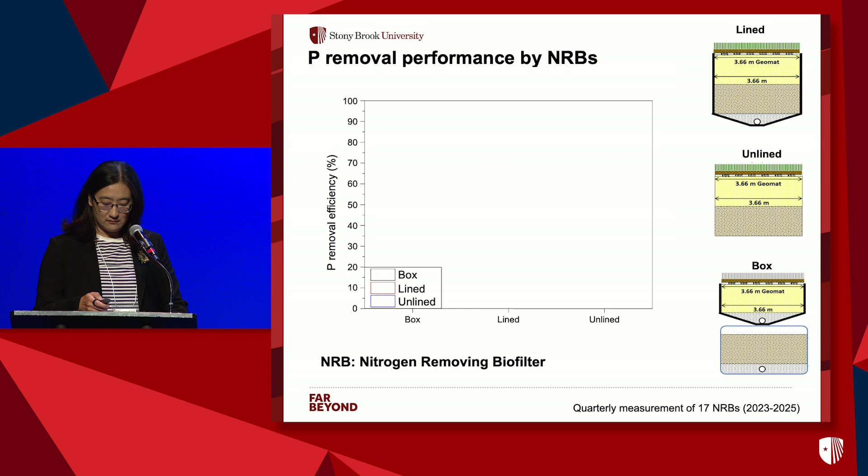So let's first take a look at our effort on the NRB monitoring. I don't know why these do not show up, but basically there's this very busy figure. We have been monitoring the NRBs' performance for their phosphorus removal over the past 3 years. We have been conducting quarterly monitoring. What I'm trying to show you is that the influent phosphorus level from the septic tank effluent is really fluctuating over time.

Sorry. This is supposed to be a summary slide. Basically, what I'm trying to tell you is that all three types of configurations have shown a substantial phosphorus removal in the range of 60% to 80%. So the data tells us these NRBs not only remove nitrogen as they are supposed to do, they can also remove a substantial level of phosphorus.

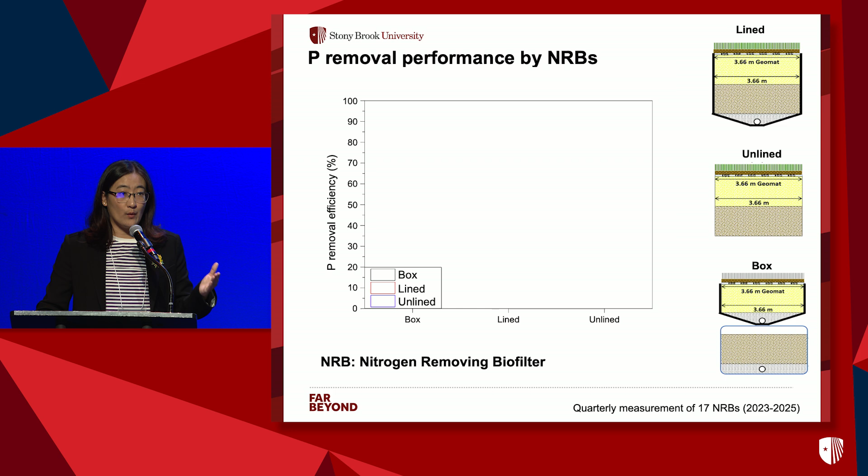So the question becomes, where is this phosphorus being retained, in which unit? And would this retention be sustainable over time? In order to answer this question, we conducted two parallel studies to evaluate these two separate units, the nitrification unit and the denitrification unit. And we also compared the system performance between the newly installed NRBs and the aged NRBs.

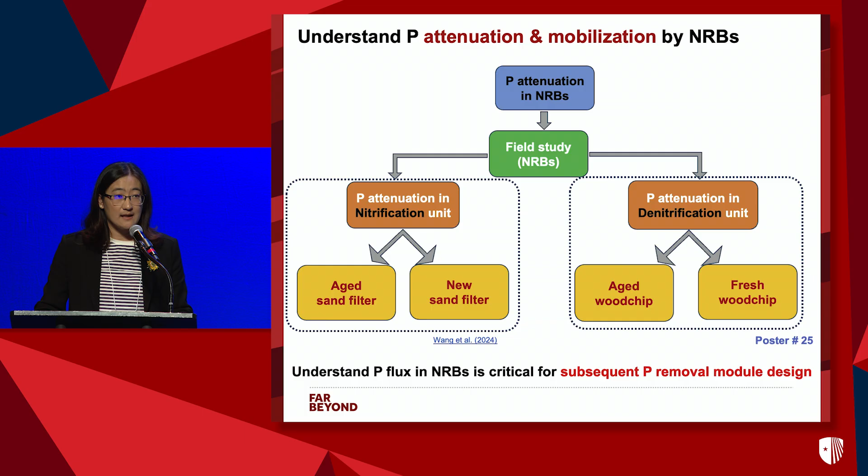We try to understand where this phosphorus is being retained and where it can be released to the environment. Understanding this phosphorus flux is very critical for us because if it is finally leaching from NRBs, we are going to design a final polishing unit to capture that phosphorus.

So let's first take a look at the performance of the nitrification unit. What we did is we constructed several lab-scale columns using aged sand and fresh sand. We applied septic tank effluent to all these columns. This figure shows you that the aged sand can remove roughly 50% of the total phosphorus from the septic tank effluent, while the new sand can remove roughly about 30%.

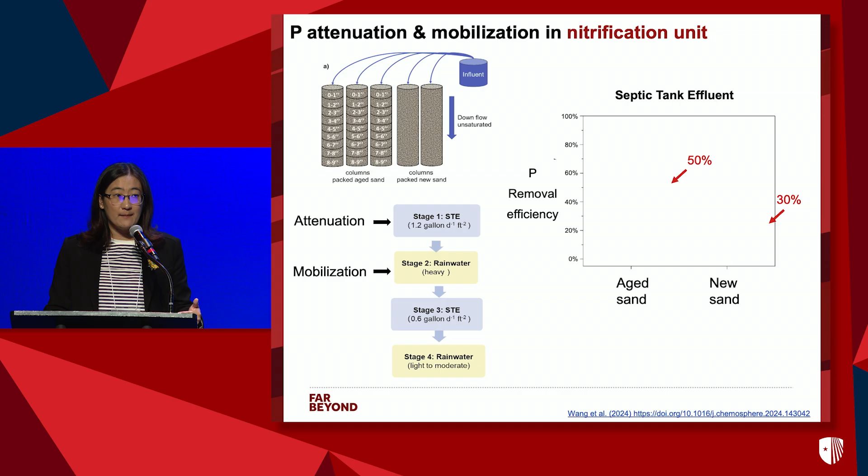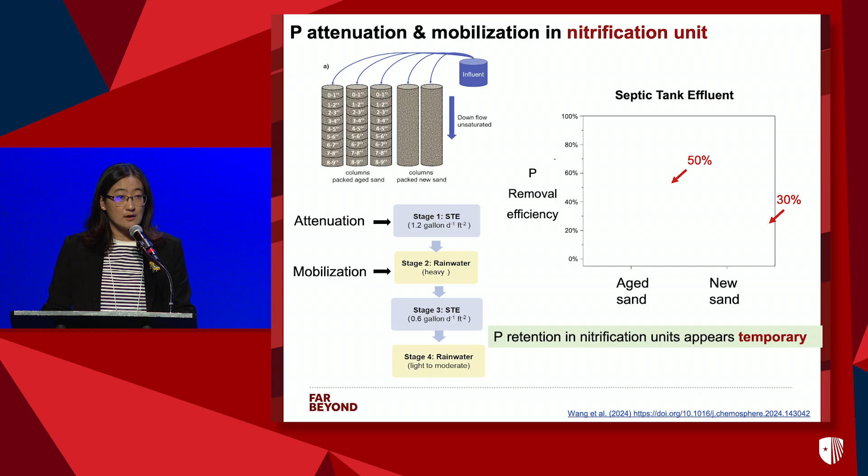We also applied synthetic rainwater to mimic natural precipitation. We observed that the phosphorus can be leached out from both aged sand and fresh sand. So these results tell us the phosphorus retention in the nitrification unit is temporary, and there's a potential for that phosphorus to be remobilized. The same trend was observed in the denitrification unit as well.

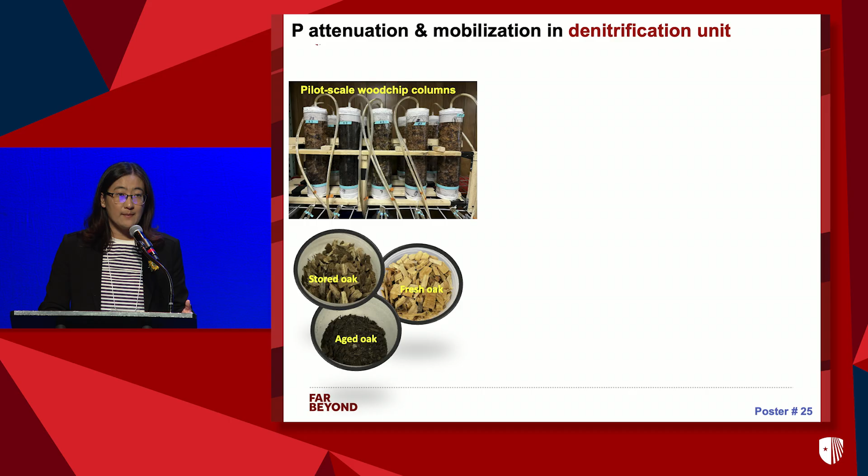We also constructed parallel wood chip reactors using fresh wood chip, aged wood chip, as well as wood chip that has been in storage for a couple of years. We applied the nitrified effluent, which will enter our denitrification unit, in our pilot testing columns. We also changed the phosphorus levels in this nitrified effluent, and later on applied a synthetic stormwater to see if the phosphorus can be leached out.

As you can see here in the summary, in terms of phosphorus removal, the storage wood chip can remove most of the phosphorus, followed by the fresh and aged wood chips. And when we look at the potential of phosphorus release, the aged wood chips can actually release a significant amount of phosphorus.

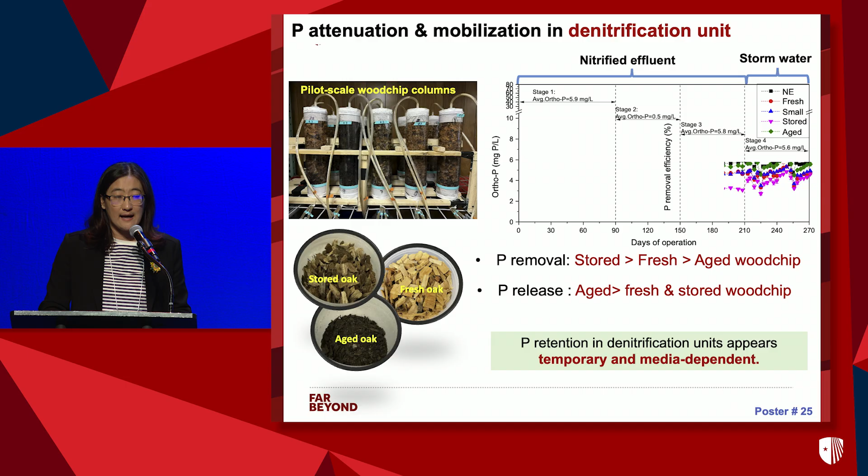So basically what these results tell us is that the denitrification unit can also temporarily retain phosphorus, and the capacity of this retention is strongly impacted by the age of the systems. Taken together, these two studies directly motivated our subsequent effort to develop a polishing unit to really capture that phosphorus.

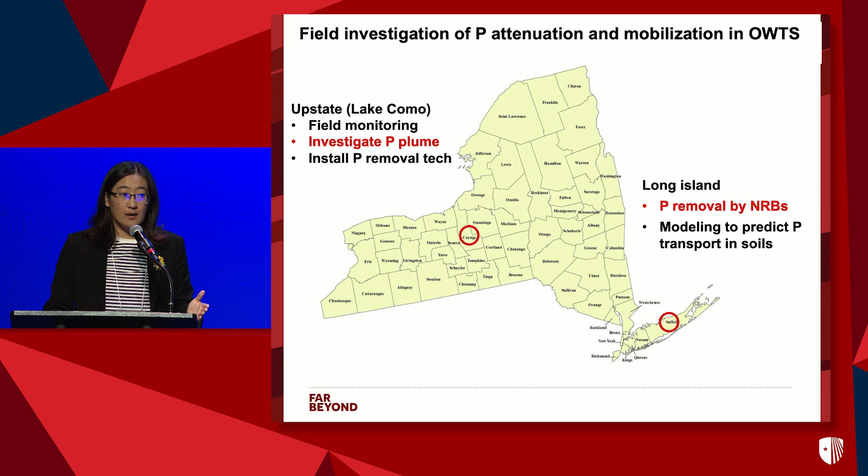The other study that we conducted in upstate New York is trying to help us understand, if phosphorus leaves the on-site system and enters the environment, how it would move in the surrounding environment. To answer this question, we identified a few study sites in Lake Como, which is a sub-watershed of Lake Cayuga. We selected study sites which represent different land use settings, including farmland, forest, as well as wetland. At these sites, we have been monitoring the groundwater, and we also collected soil core samples and lake waters. We also conducted statistical analysis with the results we obtained.

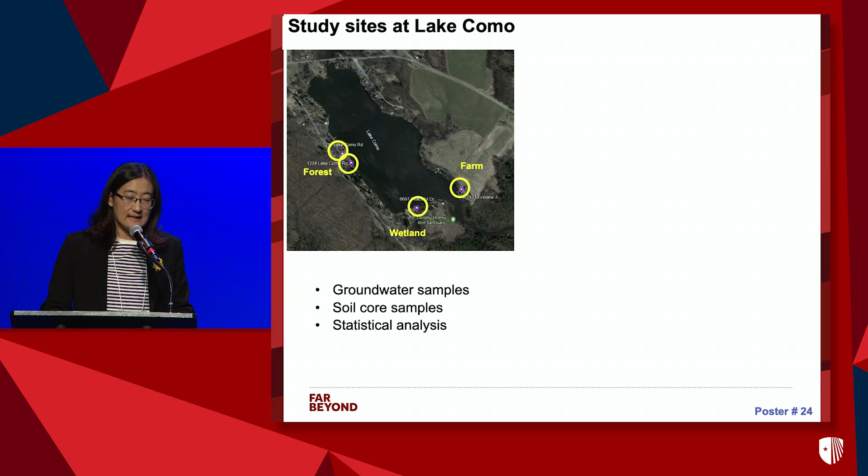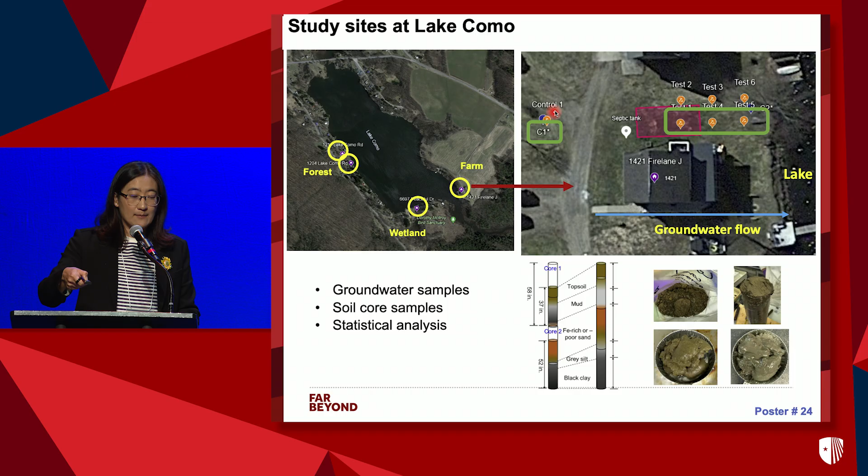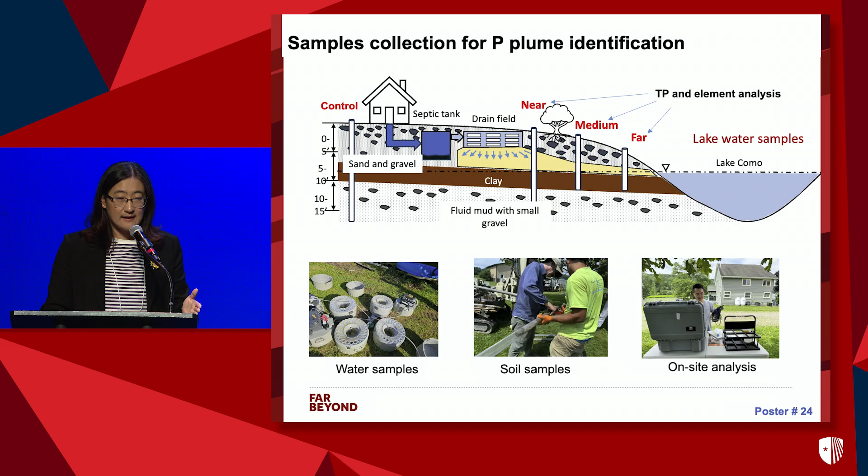On the right, I will give you an example of one site close to a farmland. You can see here is the groundwater flow direction. We collected soil samples between the drain field and the lake water, and upstream we also collected a control sample to analyze these soil profiles. In the next slide, I can show you from a side view where we collected all those soil samples. Here is the control sample, and depending on the location of our soil cores, we collected close to the drain field, medium distance, and further from the drain field. We collected at different depths, and all the samples were tested for total phosphorus content as well as background metal concentrations.

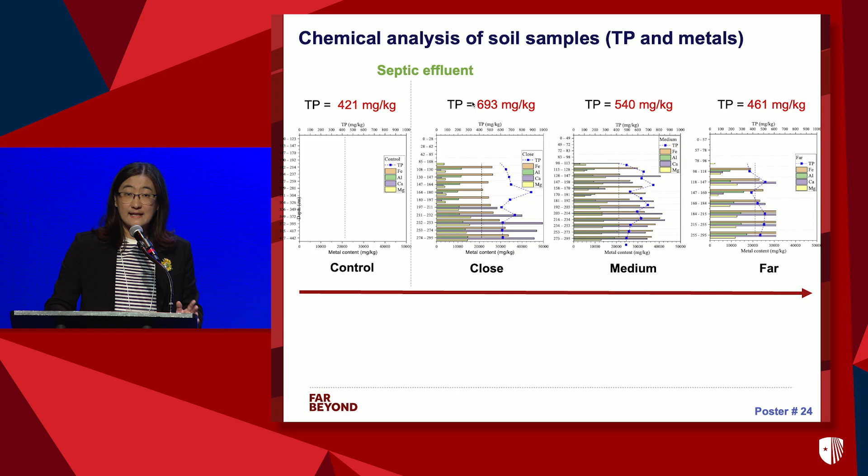In the next slide, here is a very busy slide. You can see several data sets, but I would like to focus your attention on the blue line. I think the first one is missing, but the blue lines show you the total phosphorus concentration at the different depths of these 4 locations. When septic tank effluent enters the drain field, you will see the total phosphorus level increase by almost 60% compared with the control site. And this total phosphorus level will decrease as you go further from the drain field.

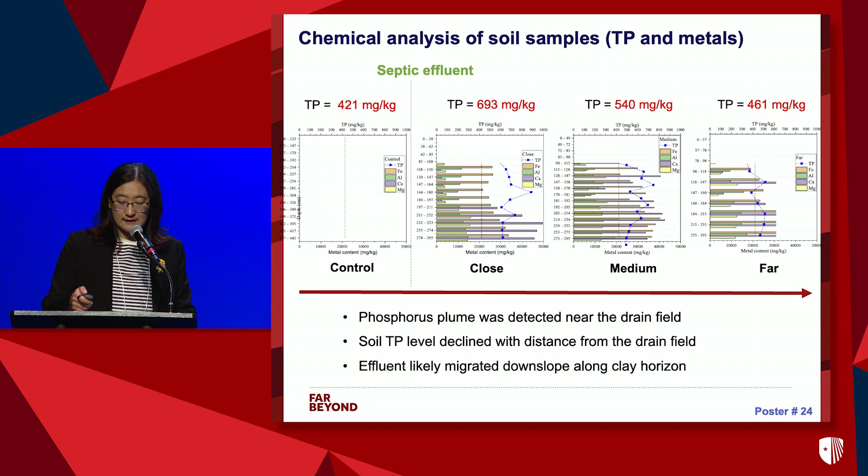So this is a very clear pattern showing this wastewater-impacted phosphorus plume at this watershed. We found the total phosphorus concentration decreases with distance, and because there's a clay layer at the bottom of this specific study site, the concentration of total phosphorus increases when it gets close to the clay layer. So now we understand that there is a phosphorus plume at this study site.

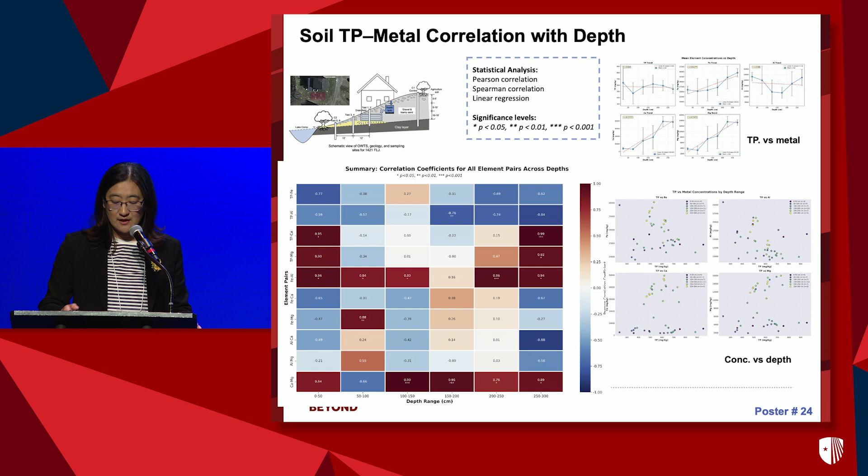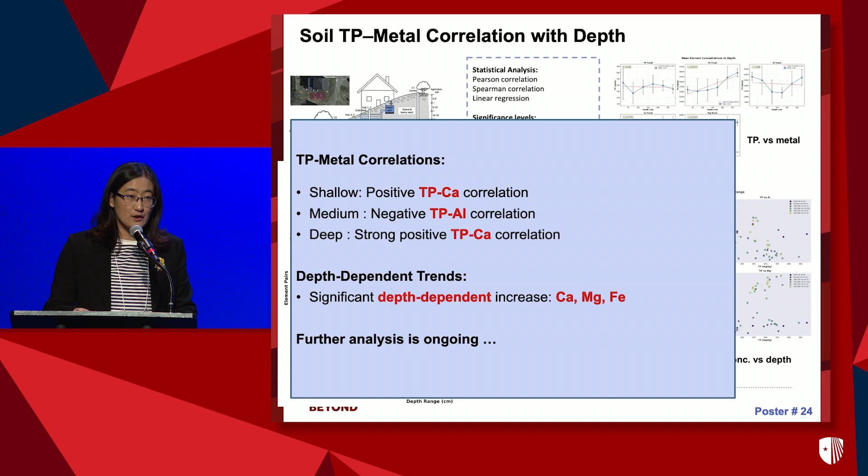Another question that comes up is, can we tell which factors really control these total phosphorus levels, high or low, and how much it will move? So we conducted a series of statistical analyses. What we found from our initial analysis is that certain metals such as calcium, magnesium, and iron increase in concentration as depth increases at the study site. But the correlation between total phosphorus and those metal oxide concentrations varies at different vertical locations, which tells us that at this specific site, total phosphorus levels are highly impacted by the specific site conditions, by the geochemical conditions.

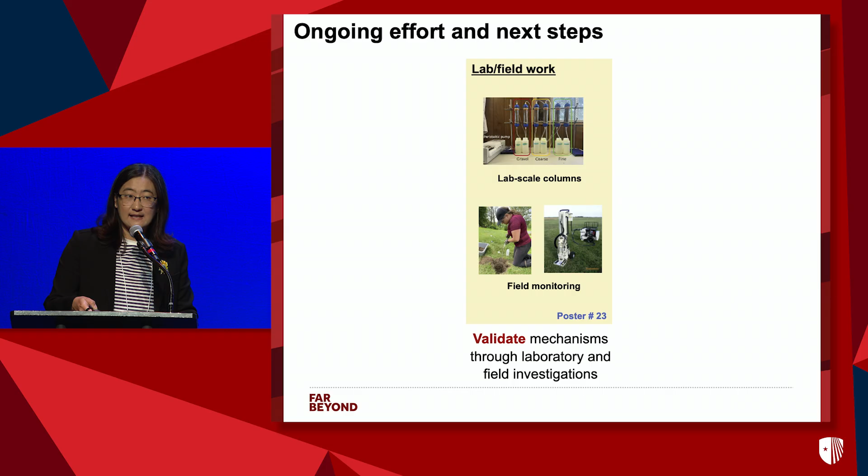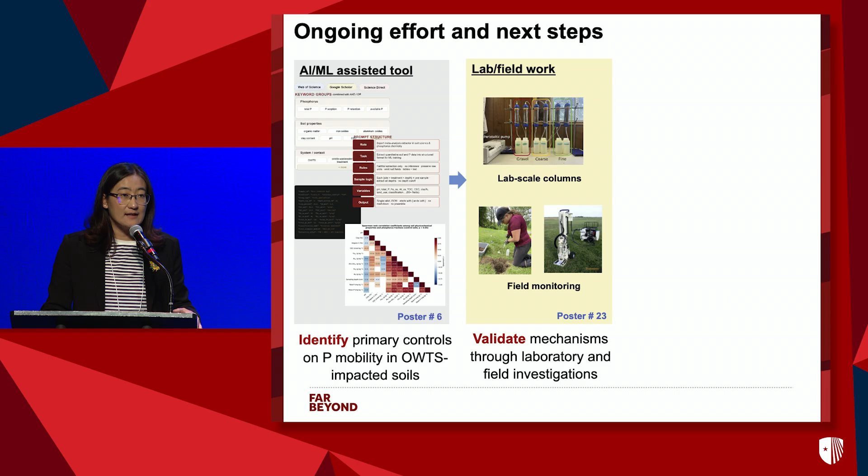Based on what we have found from these field studies, our current effort will continue to conduct lab-scale column studies in controlled environments and continue our field investigation. In parallel, we're now using AI and machine learning tools to dig into tens of thousands of manuscripts and literature to identify the primary factors that may govern total phosphorus levels. We're also working on fate and transport models that will improve our ability to predict total phosphorus presence and mobility. These tools will also help us identify locations with the greatest risk of phosphorus loss, and guide us to select the best technology to put at that site.

So from the field monitoring effort, the question becomes, is there any phosphorus removal technology available on the market that can really solve the problem? So now I'm going to move to my second section of the presentation to look at commercial product validation.

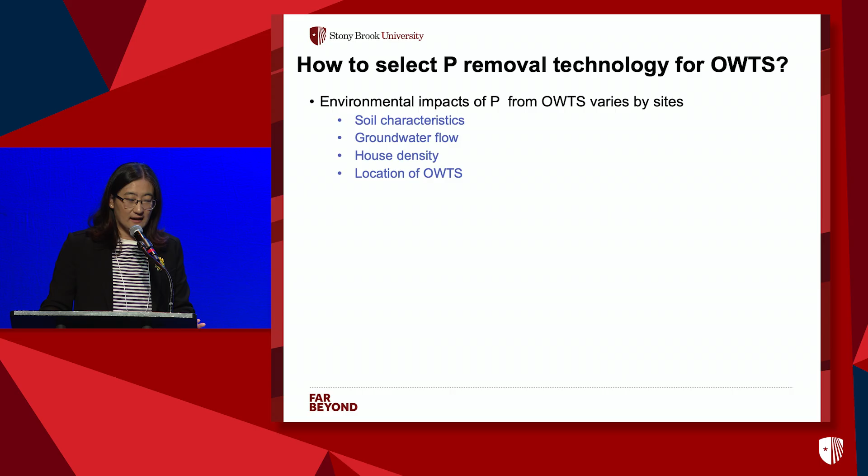So over the past few years, one of the very important lessons we have learned is that for this phosphorus from on-site wastewater systems, when we look at their presence, attenuation, and mobilization, it is really impacted by very complicated geochemical conditions, and also the groundwater flow velocity, the housing density, and so on. So that means there's no single solution that can be applied everywhere. So in order to apply such a technology to solve the problem, we have to be very site-specific.

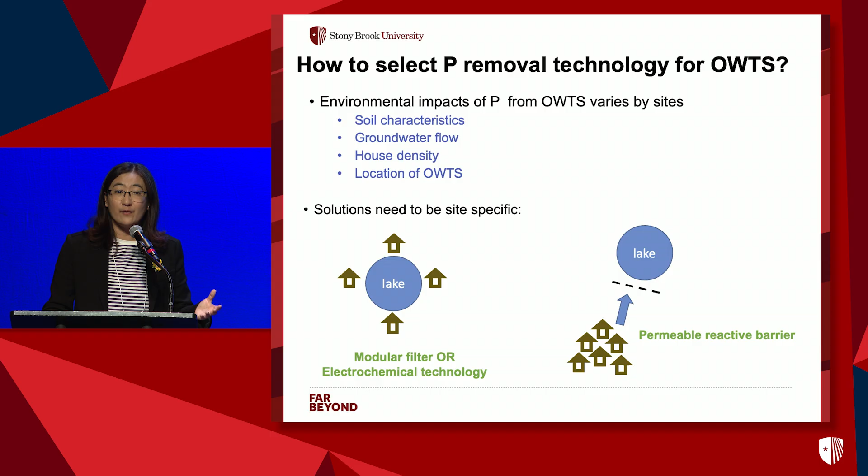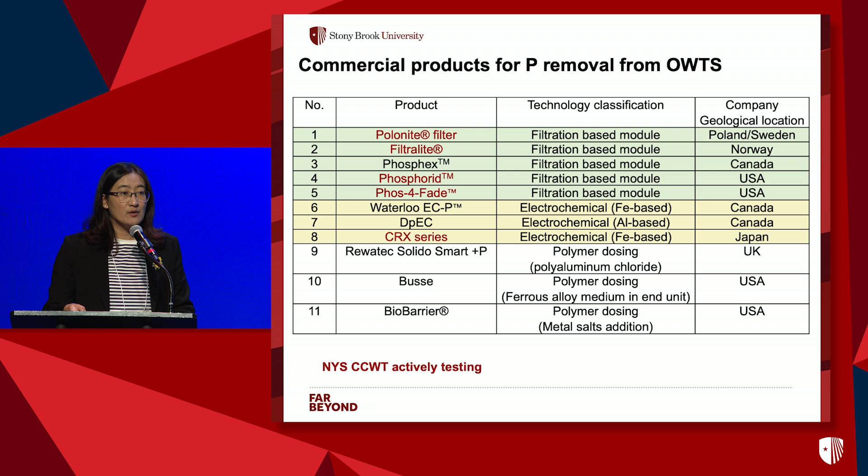So that is the reason that the center has established an independent evaluation program so that we can evaluate the currently commercially available products and identify their advantages, limitations, and the best scenario for that technology to be applied. So in this slide, here is a table to show you a summary of certain commercial technologies that are currently available on the market. Depending on their removal mechanism, we can group them into three categories: filter-based media, electrochemical technology, and metal dosing technologies.

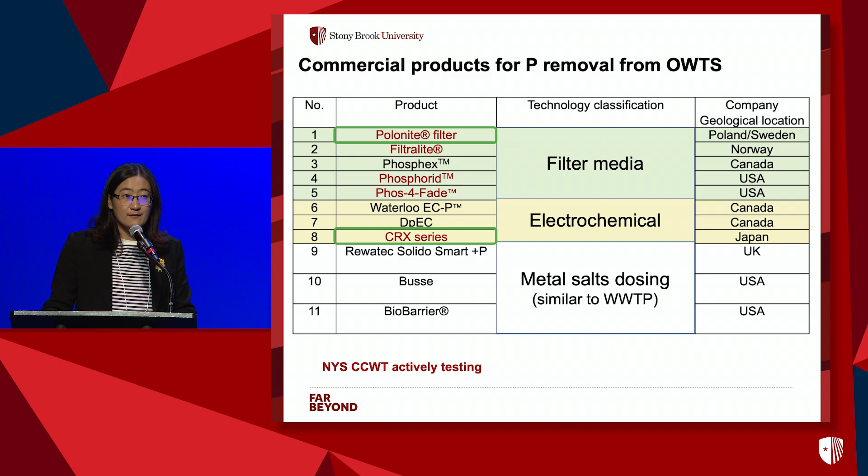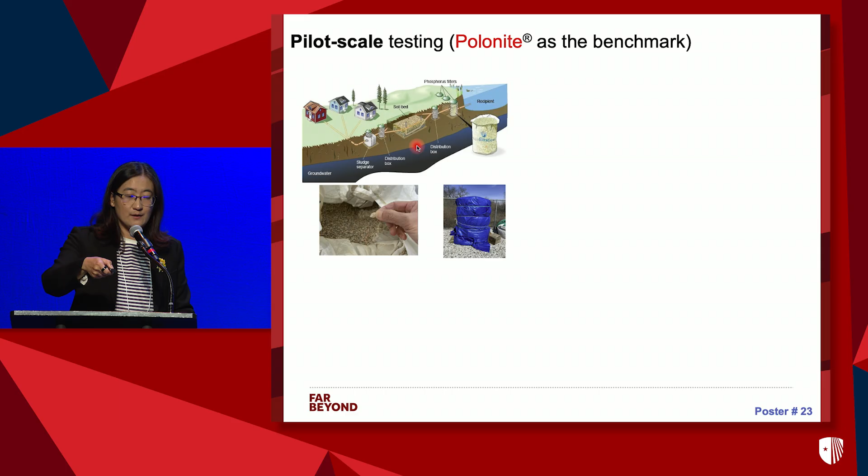So today I'm going to give you two quick examples to show you two of the technologies that the center is currently actively evaluating. The first one is called a Polonite filter. Polonite is a mineral filter that is produced in Poland. This product has been widely used in Northern Europe, and it serves as a polishing unit at the end of the treatment train of an on-site wastewater treatment unit. So at the center, we use Polonite as a benchmark.

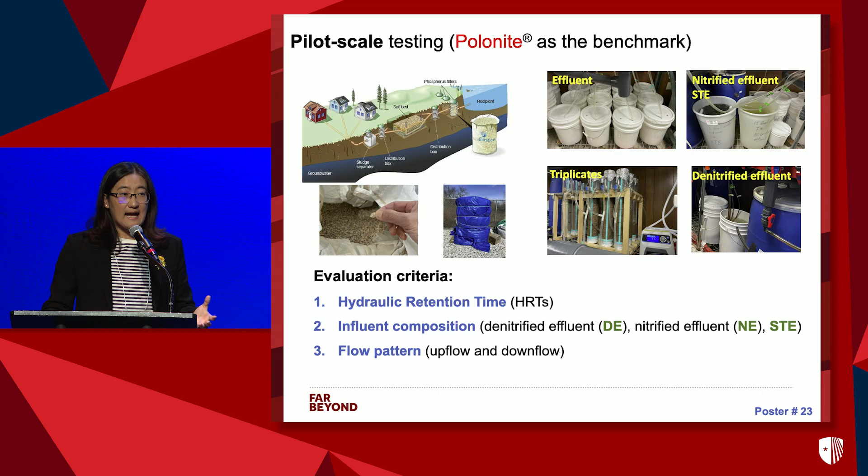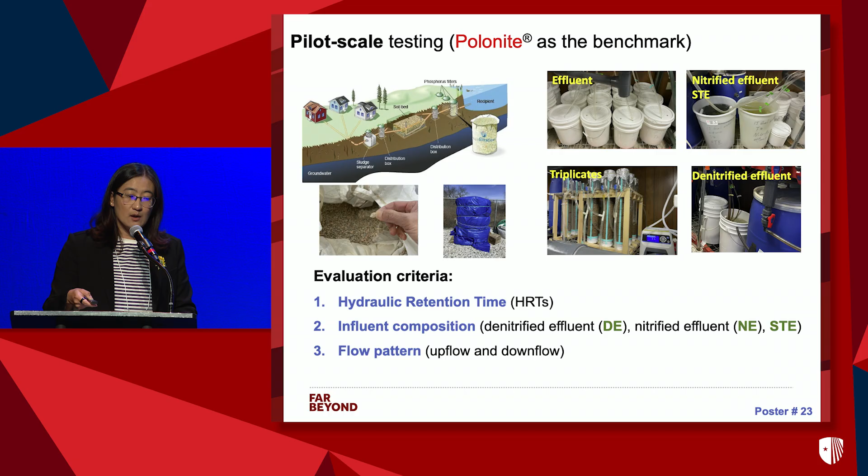In the research trailer, we have constructed a pilot scale test. We're testing this media using different hydraulic loadings and different flow configurations, either upflow saturated conditions or downflow gravity-driven conditions. We're also testing the filter's performance by treating different types of wastewater, like septic tank effluent, nitrified effluent, or denitrified effluent. We have conducted this pilot testing for over 500 days.

And also, if we extend the hydraulic retention time, which means when the system size is a little bit bigger, you can really extend the system longevity. So basically, we use this Polonite benchmark to serve as the comparison base. We developed an SOP so we can compare other commercial products to see their performance compared with Polonite.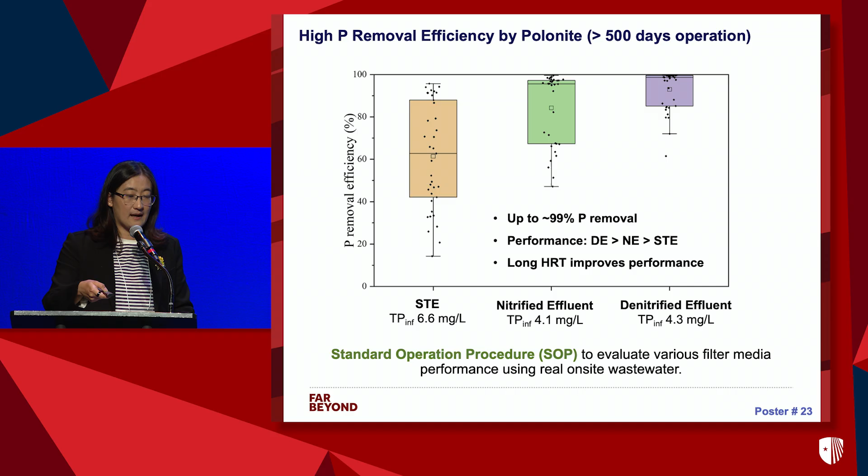So now we know Polonite really did a good job removing phosphorus, but we also have another question: how much phosphorus can this material retain? It is a very important question because it will help us decide the maintenance frequency. When do we need to replace the filter? And is there any potential to recover phosphorus from this filter?

So in this slide, you can see all these columns are color-coded. Sorry, I think I need to get familiar with my pointer. So how can I go back? Right, okay.

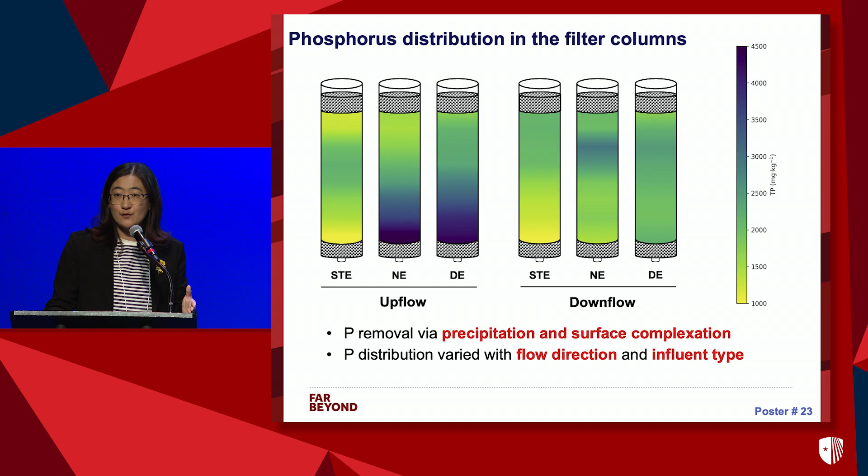So basically, these columns are color-coded. The darker the color, the more phosphorus it has attenuated. You can see here that in the upflow configuration, the blue color means more phosphorus is being retained. When we are treating nitrified effluent and denitrified effluent, most of the phosphorus is attenuated. This also agrees with our physical-chemical experimental data that when we use Polonite to treat denitrified effluent, it gives us the best performance.

Another commercial product, the electrochemical technology, we're also testing. The electrochemical approach provides an alternative, a very compact and highly controllable unit that can be integrated into the current IA system. The figure on the top left shows the basic mechanism: when we apply a low current density, the electrode, especially the anode in red, will release metal ions, either iron or aluminum. These metal ions precipitate phosphate, which can be removed from the wastewater.

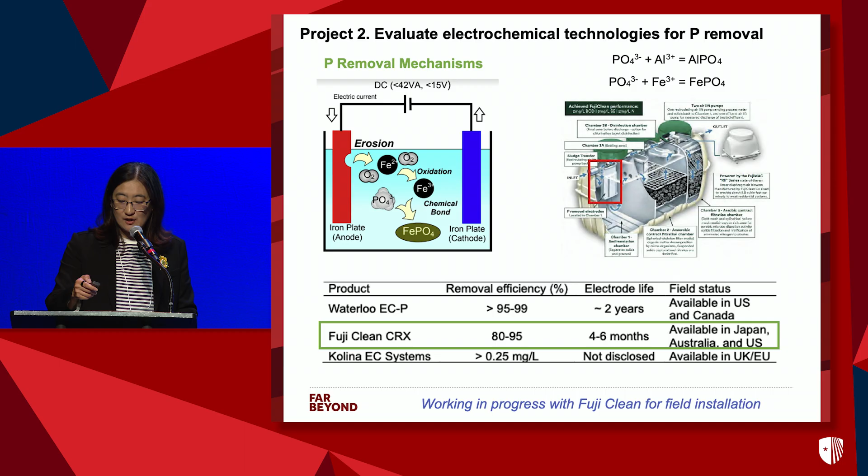There are a couple of companies who have these products. The center is currently working with Fuji Clean to move forward on field installation and evaluation. My colleague will talk more on those details in the following presentation, so I'm going to leave it here.

So although these commercial technologies have demonstrated very good performance and show some promise, there are still opportunities for us to continue to research and develop new technologies in order to improve the removal efficiency, lower the cost, and also provide the potential to recover phosphorus.

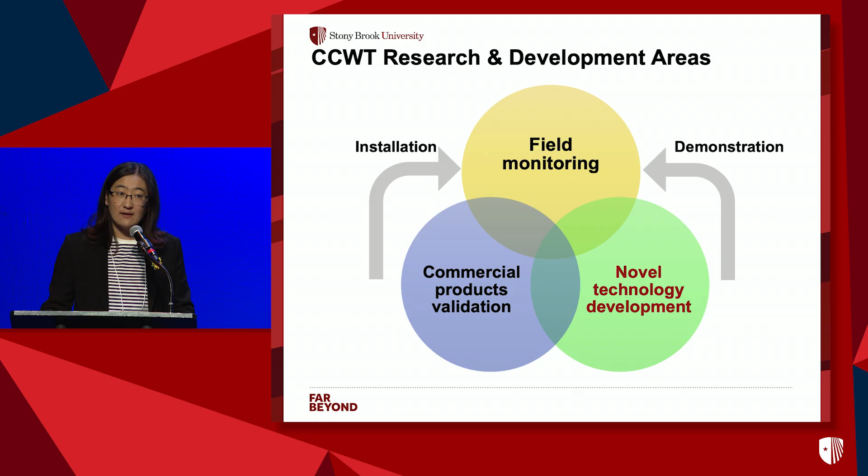So as a center, when we visualize the next generation of IA systems, we think our system will not only remove nitrogen and phosphorus, but we would also like to provide the opportunity to really transform phosphorus from a pollutant to a recoverable resource. In the meantime, in order to control the system performance, extend its longevity and have better management, we also need to couple in-situ monitoring technologies.

So that is why in the R&D effort, we are currently working in parallel on three areas. The first one is novel phosphorus removal media development. We're also working on electrochemical technology to use as a phosphorus recovery unit. And we're developing in-situ phosphorus sensors that can be used to detect phosphorus at different levels.

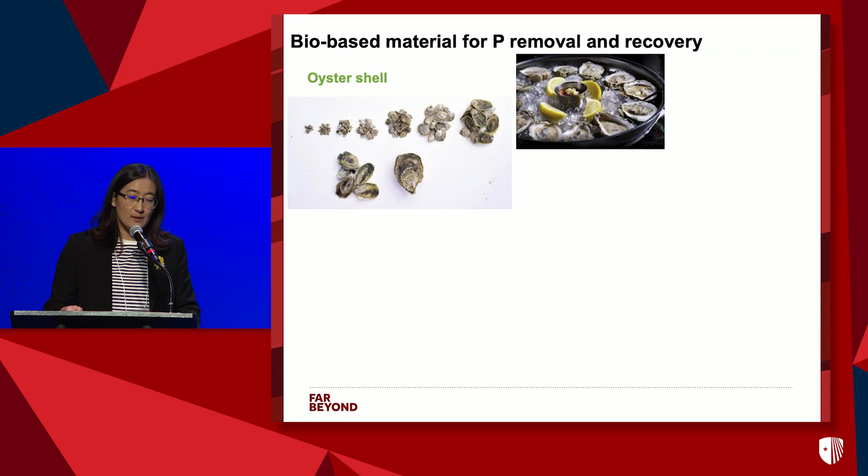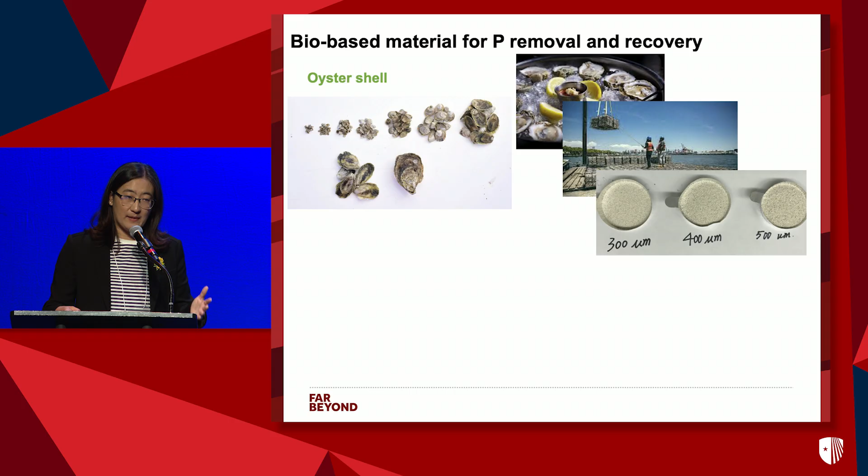So I'm going to start with the first one, the bio-based material for phosphorus removal. Here we use oyster shell. Oyster shell is produced in large quantity from the seafood industry as a waste. In recent years, people have put some effort into repurposing oyster shell for coastal resiliency applications. But at the center, we take oyster shell as a potential candidate to help us remove and recover phosphorus.

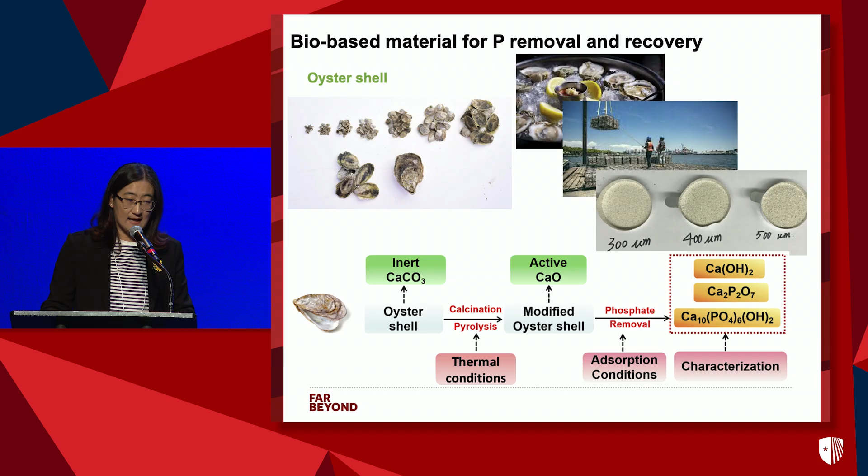This is actually from a very simple chemical conversion. If you heat up the oyster shell at a certain high temperature, the main component, calcium carbonate, will be converted to calcium oxide, which is a very active media that will react with the phosphorus and precipitate it. So our initial work was to optimize the thermal conversion conditions in order to make this work.

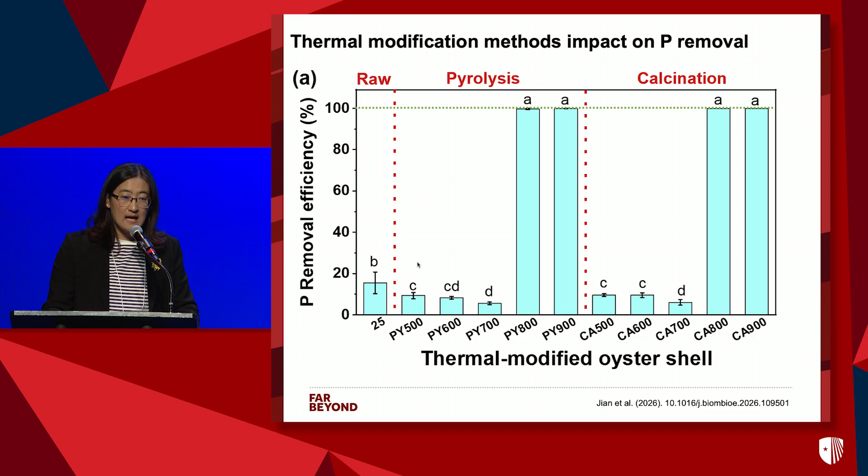But the challenge here is how do we really apply this material? As you know, calcium oxide is very active. It will dissolve in the water right away. And as a powder, how could we integrate it into our passive filter systems? So the team invented a novel approach, which we call a one-pot synthesis of calcium oxide-loaded granular porous media.

We integrate the oyster shell with wood chips as well as a binding reagent like starch. We form granules and heat them up together. By doing that, the calcium oxide is captured in a very complex carbon network. Then when we apply it to flow-through columns, the calcium is gradually released to react with the phosphorus. As you can see on the right side, when we apply real on-site wastewater to test their performance, they can remove over 99% of phosphorus.

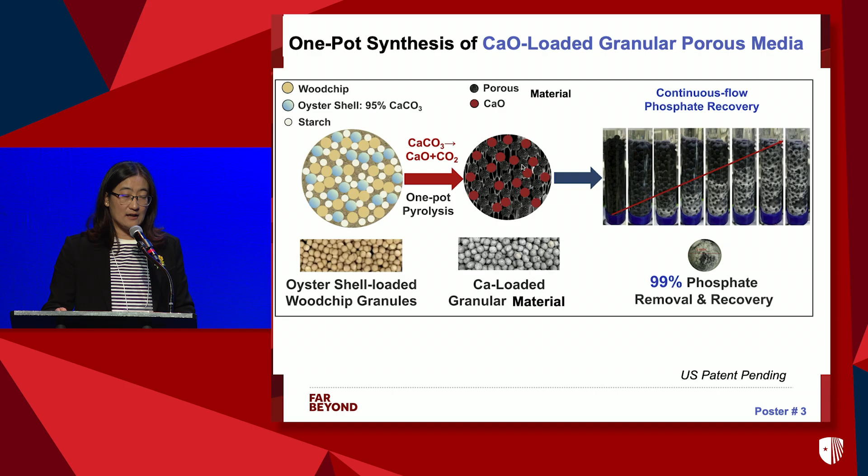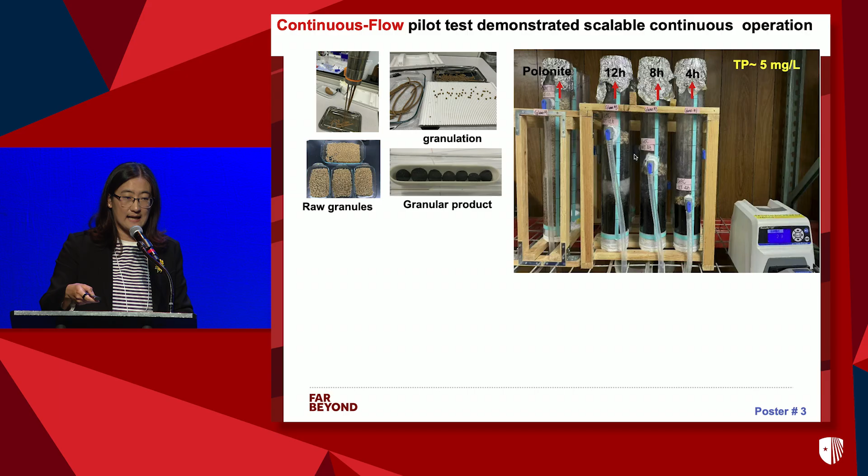In order to validate this process, we scaled it up in our research trailer. You can see this is how we synthesize the granules in the lab, and we constructed the columns in the research trailer, applying real on-site wastewater to test them. These media can remove over 99% of phosphorus under continuous flow, 24/7, over 70 days. Here are some photos of the media before and after treatment. These white coatings indicate the phosphorus has been removed as a precipitate.

So this is just an example I want to share with you. The center is also working on other potential bio-waste conversion, like filter media such as cellulose. You will see some of the posters. But these material developments really feed our long-term goal that we are not only going to address this phosphorus pollution issue, we're also addressing multiple challenges at the same time by addressing bio-waste repurposing and also nutrient recovery as well as new fertilizer production.

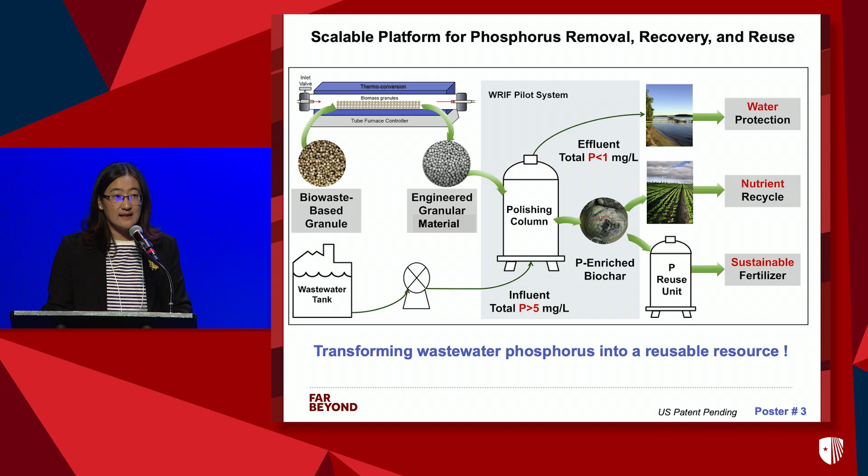So as I mentioned, this is the passive filter that we developed. There's an alternative approach to recover phosphorus, which is to repurpose this electrocoagulation unit as a polishing module at the end of the treatment train. Our work started from bench scale optimization analysis, selecting the best combination of electrodes that will give us the best phosphorus removal performance. Then those best working conditions, such as the current density, the electrode types and the distance between the electrodes, will help us design our pilot scale studies.

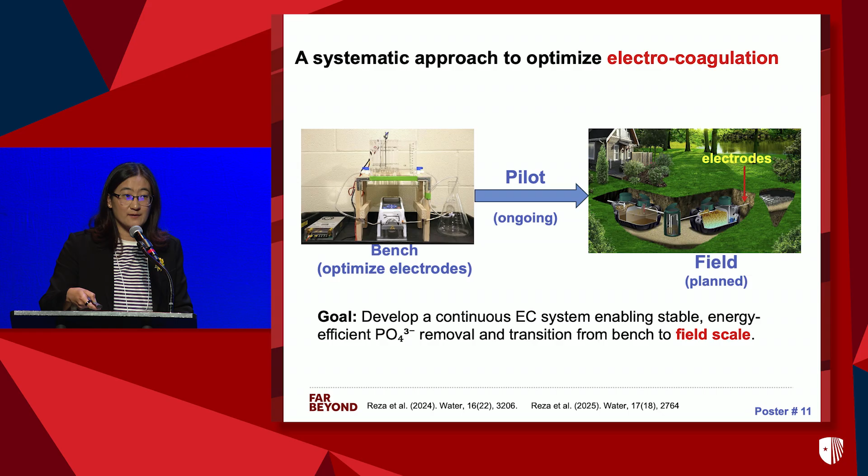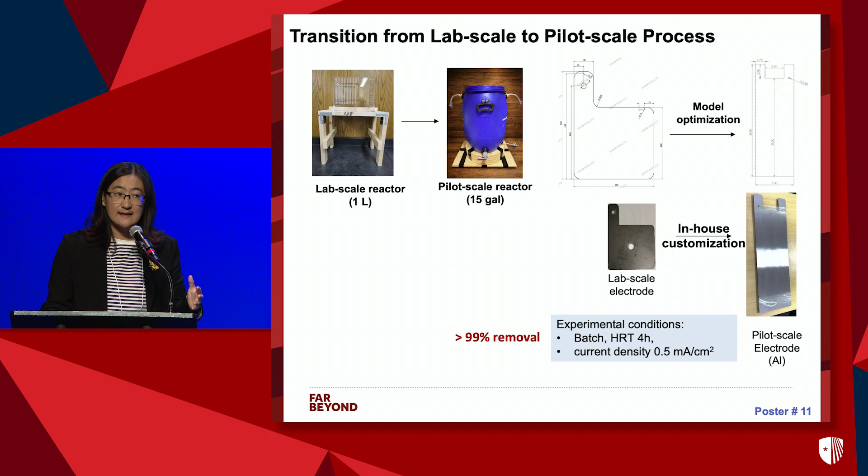So now we're at the stage of pilot testing our best combinations of electrodes. Our ultimate goal is to deploy this polishing unit to really recover phosphorus at the end of our treatment train. Here I want to show you very briefly, I think that figure didn't show up, but basically we are testing these electrodes that we fabricate in-house. Currently we test these electrodes in a batch condition, and over 4 hours of operation, a very short period of time, we can achieve over 99% total phosphorus removal from the wastewater.

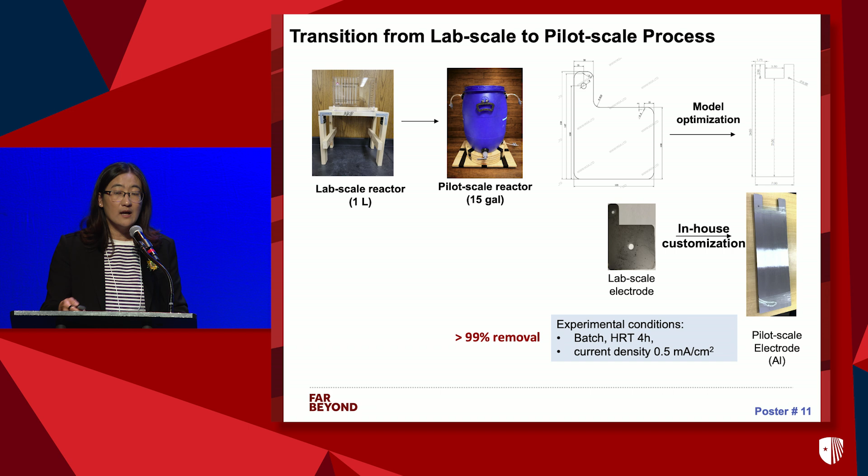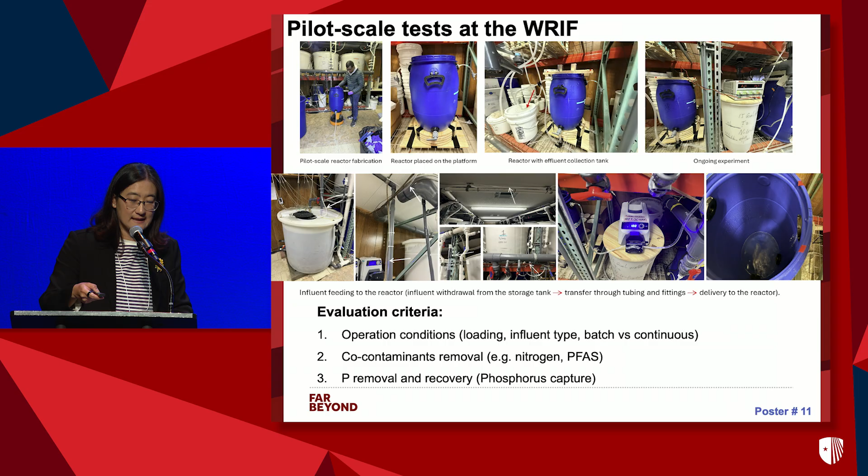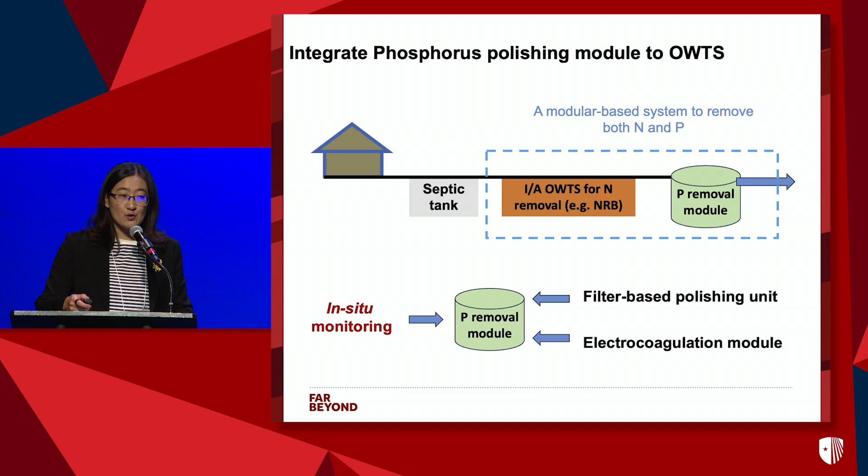These are a few photos showing how we fabricated and assembled our pilot scale EC unit. We are currently evaluating co-contaminant removal together with the phosphorus, and we are identifying the best way to capture the phosphorus from the final effluent. As I mentioned, in order to develop this next generation IA system, we will not stop at technology for phosphorus removal and recovery. It's equally important to develop in-situ monitoring tools to help make this system really intelligent.

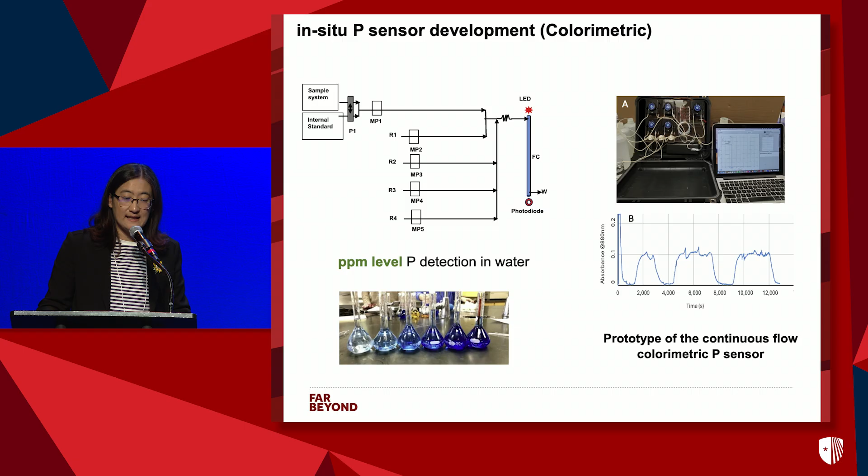The center is currently developing 2 parallel in-situ phosphorus sensors. The first one, as you can see here, is based on the standard classical ascorbic acid method, which is a colorimetric method. We have developed a prototype that can measure phosphorus concentration at ppm levels. The unique feature of this system is that it can self-calibrate after every 20 cycles of operation, which significantly increases the accuracy and stability of the sensor. The latest version of this prototype is currently under fabrication, and we expect to get it by this summer.

Another very exciting in-situ sensor we're working on is this nanodot-based phosphorus sensor based on fluorescence emission. It looks very complicated in this figure, but I would like you to think about this sensor as a light switch. After we synthesize these nanodots, they can absorb and emit fluorescence. But on purpose, we provided some blocking components and reagent. If phosphorus is present in the water, phosphorus will combine with those blocking reagents, and then the light will come back. So the lighter the image, the more phosphorus is present in the water. Because of this unique feature, we can tune the sensitivity of our sensor and adjust its test range.

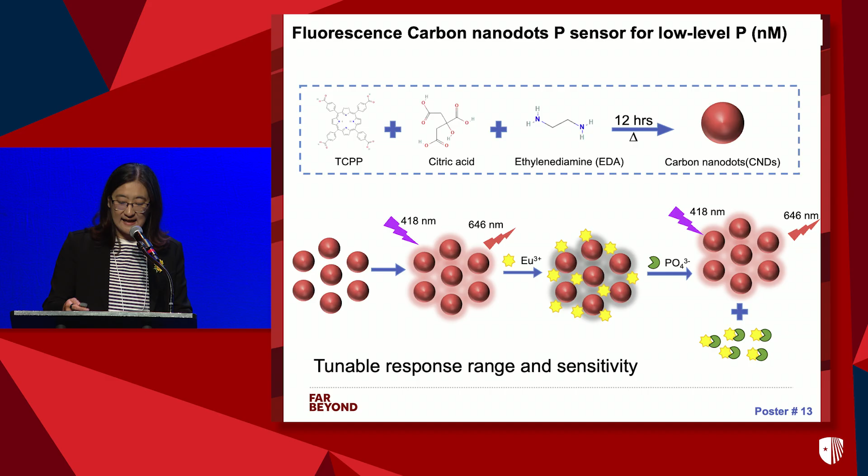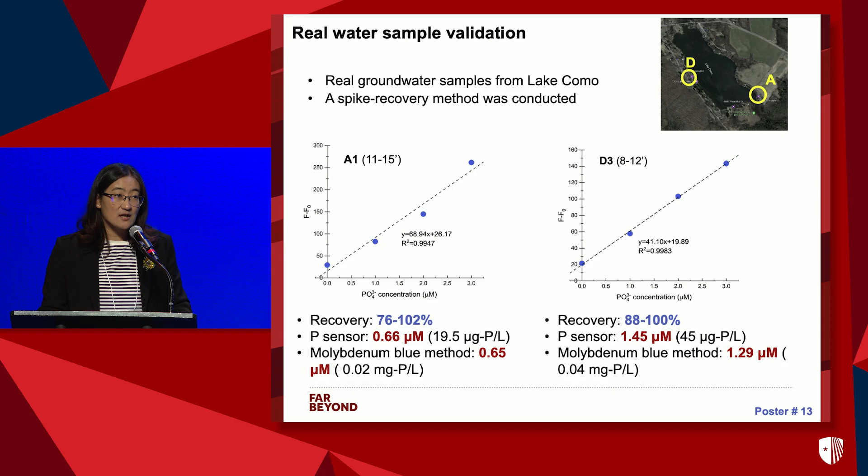We have also validated this sensor's performance using real environmental samples collected from our upstate field study. You can see here the red color indicates our sensor measurement has very strong agreement with our conventional analytical test. In our ongoing R&D effort, we will continue to investigate these three parallel projects, and we'll focus more on phosphorus recovery, co-contaminant removal, and field deployment.

As the take-home message, I'm not going to read all the bullet points, but I want to emphasize what I have covered for these three complementary areas. From the field work, we found that conventional IA systems temporarily retain phosphorus, but they can eventually release it to the environment. And when phosphorus gets to the environment, its fate and transport are strongly affected by site-specific natural conditions. We have identified a few promising commercial technologies to remove phosphorus, and we are developing exciting filter-based media, an electrocoagulation module, and in-situ sensors.

Taking these together, this will fulfill our long-term goal to transform phosphorus from a pollutant to a recoverable resource, and in the meantime protect our sensitive water quality using this integrated and sustainable wastewater management.